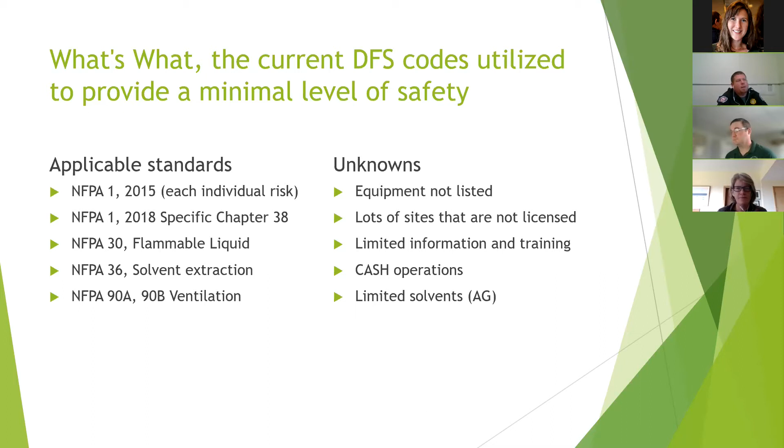I'll let Ben go to the next slide. Thank you, Landon. So we wanted to talk real quick, and we're not going to spend a lot of time on this because we want to spend more time on the hazards associated.

But this is a quick slide to talk about what our permitting process is, and how people can obtain permits if they are considered a public building in accordance with the statute we've already discussed. The biggest thing is, if you have questions, feel free to reach out to us. I know sometimes it can be scary to call the state, but we're there to help, and we're not going to jump down people's throats by any means.

Generally, contact is made with one of our 4 regional offices. The state is basically split into 4 quadrants, Northeast, Northwest, Southeast, Southwest. So if you're in that geographical area, say the Northeast Kingdom, you would contact my regional office, the Waterbury office.

Typically your call is directed to a plan reviewer, who will then either loop in Landon or myself, and we'll set up a meeting. Typically the meeting is good between the owner, the engineer, design team, and a plan reviewer.

One thing to note, what we do require is that a designer of record is needed, and that's typically a licensed person, either a licensed electrical engineer, mechanical engineer, architect, or all 3 in some cases, based upon the level of the operation being requested.

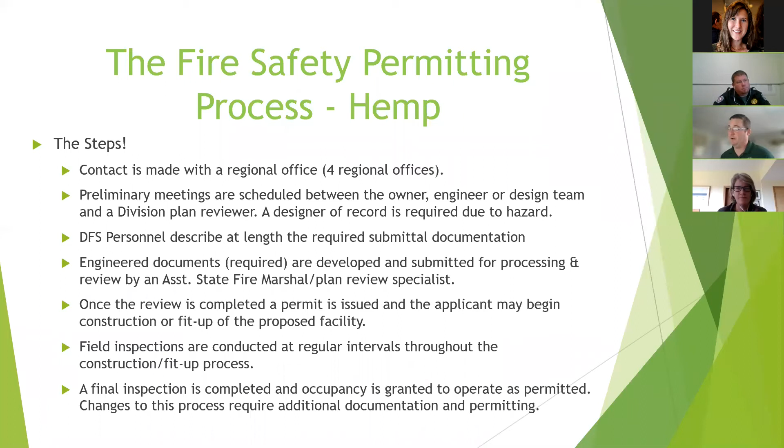The important message is that you should use equipment that's UL listed. You should also utilize equipment in accordance with its manufacturer's instructions, and you shouldn't alter equipment outside of those parameters, because that's the human factor. Once we start altering things, that's where Ben and I see the greatest risk and hazards associated with the industry.

This is just a small scale example, not something you're typically going to see in an on-farm operation, but the premise of using things the way they're intended to be utilized goes through all scales of production. It doesn't just stop at your small home grower, it goes all the way up through some of the larger cannabis producers. Let's face it, in Vermont we're very resourceful people, and we do what we have to do to get the job done. But sometimes what happens is we create inadvertent safety risks.

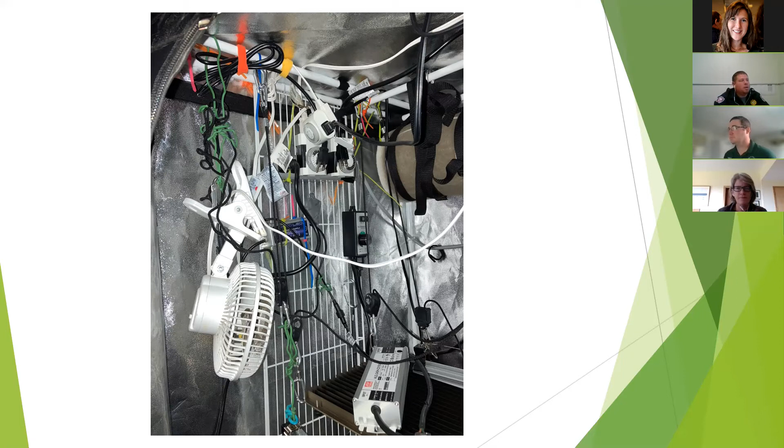So our role in this is somewhat limited, admittedly, but something we certainly want people to be aware of when applying these substances inside of buildings. A part of our role when it comes to herbicides, fungicides, pesticides is storage of those products, to make sure that they're stored in limited quantities allowed by the codes and standards we adopt. And like Ben mentioned, signage is a form of notification, but also notifying the local fire department if you're going to be doing some fumigating of hazardous materials is something else our codes require, for obvious reasons, so that we don't have unintended exposure to a hazardous product.

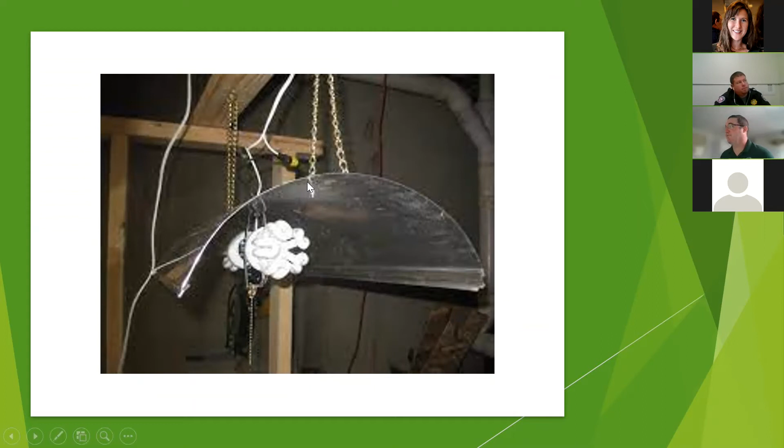That was a great question, thanks Landon. So again, another example here - looks like we have some zip cords that have been separated to make this lighting fixture. This actually looks like a piece of chimney tin or rigid metal ductwork that someone made into a light. Again, ingenuity is definitely in our roots here in Vermont. This person probably doesn't think there's any hazard here, but as a code official and fire marshal, this certainly has some hazards associated with it.

Again, there's more examples here of various grow operations. These are smaller scale than you're typically going to see on your farm. But again, you have unintended consequences.

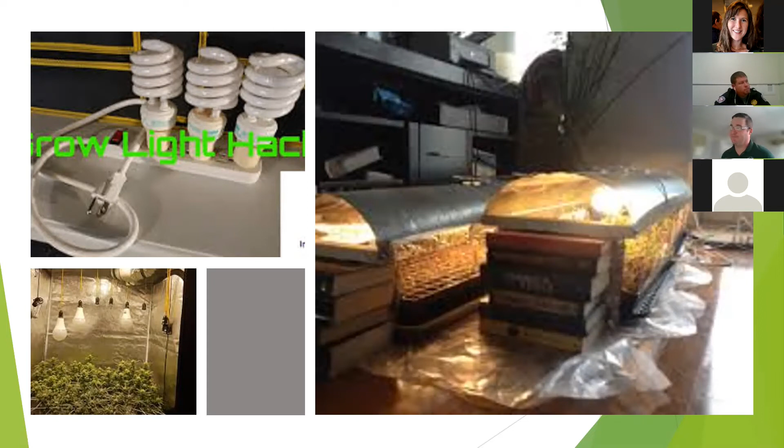In this picture on the right, we have some poly filming on the floor. We're supporting our light fixtures with books that are certainly flammable. On the left, we have light bulbs that are screwed into plug-in sockets into a power strip, not the intended use of that power strip. You're going to have a lot of heat produced there, which can potentially cause issues.

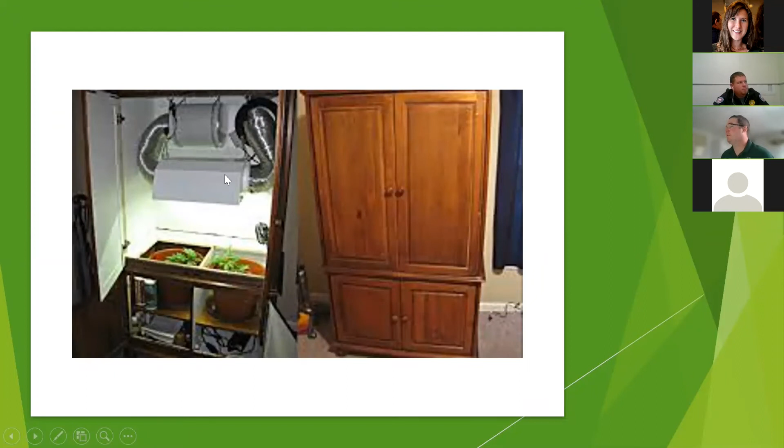So again, another example, we have a hutch that's modified to have an air handling unit in it, some lighting. The ingenuity again. So here we have more of a larger scale grow operation where we have a controlled environment. We have some sources of heat, suspended lighting with ventilation. Looks like we might have some CO2 infusion going on here. Certainly irrigation, fans for movement of air, something more along the lines of what we'd like to see for a grow operation.

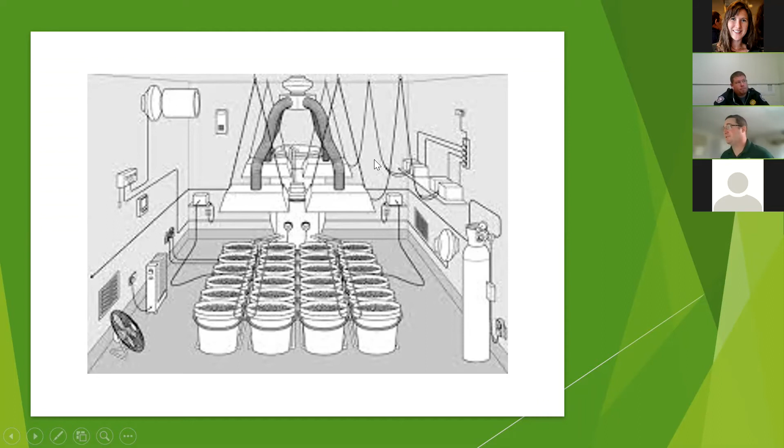And that arrangement can happen at any scale. This picture is a great example. This was a proposed grow facility, and you can see the scale of this facility. But that previous slide happens inside of this building hundreds of times over in regards to scale. But the risks are still the same. We want to make sure that we're using appropriate equipment and utilizing it in accordance with its design and its listings.

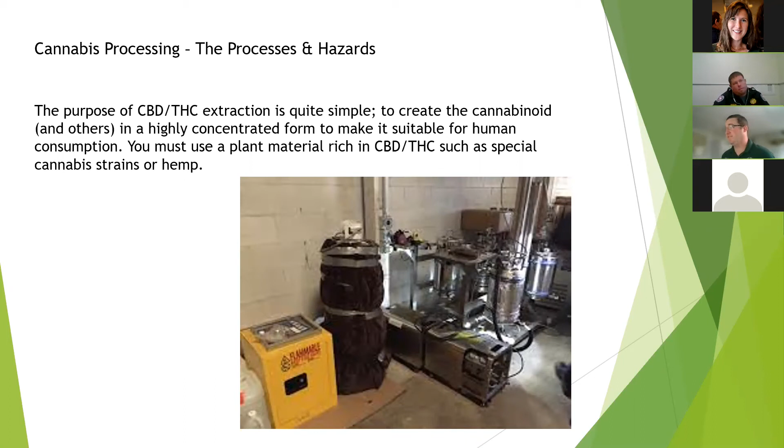And that does have hazards associated with it, unfortunately. You'll see that Ben and I have a bit of a focus on extraction because a lot of the extraction has gone both small scale and large scale. So it is something we could very likely see as part of processing on farms, and we know that does happen in the state of Vermont now.

So some of the different forms, to get through this - there's CO2 extraction. We do have pros and cons listed here for CO2 extraction, but we're just going to go through these pretty quickly. They are identified risks, and for us, from the Division of Fire Safety standpoint, it is probably the highest risk of the entire life cycle in product use of the hemp or cannabis plant.

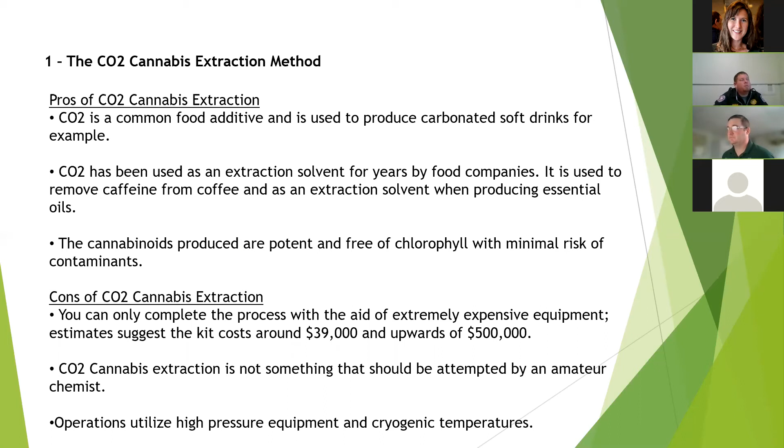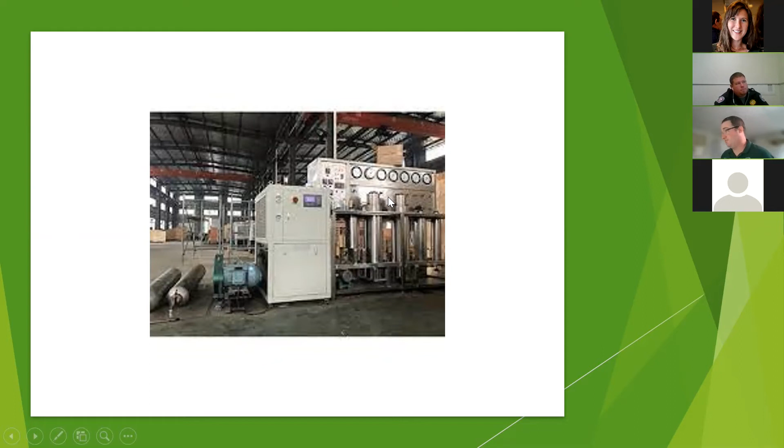Go to the next slide, Ben. So here's an example of a piece of large scale equipment. This is a CO2 extraction unit, I believe, Ben. Yep, you got the cylinders over to the right there - that's where your raw product would go in, and then the CO2 is driven through that and changed from a supercritical to subcritical state. That's where your actual raw product would come out on the other end of that process. Just a real brief overview.

Again, CO2 extraction has been used in the industry for a long time, primarily for food additives and extractions of food. So that technology is pretty well vetted. It hasn't been used a lot in the cannabis or hemp market, but it certainly is now. It's one of our more favored, I would say second only to ethanol extraction methods, just because the equipment is slightly more expensive than your average ethanol extraction skid.

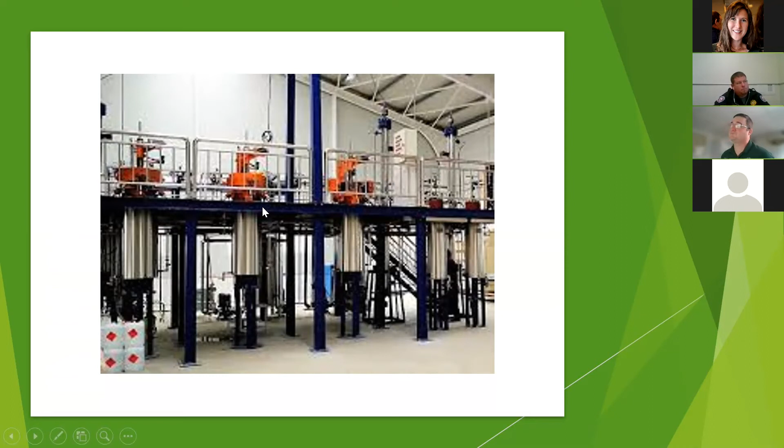Thanks, Ben. So we have some good examples and some not so good examples here of some extraction processes. This kind of doesn't look like it was really set up to be an extraction environment. We've got some product being stored that probably shouldn't be in the same environment as the processing. And when we see items like this, this is why we highly encourage anybody going into the extraction side of things to get an architect and engineer involved in their process as early as possible, so that we don't walk into a situation that may look organized in this case, but there is still a lot of risk happening in this picture. Equipment needs to be separated, storage needs to be separated, and the storage of hazardous materials needs to be regulated, with appropriate amounts for the use of the building and the life safety requirements for the building.

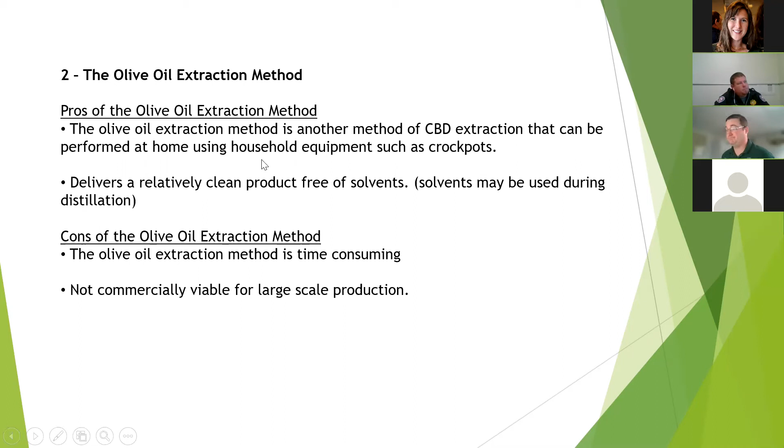Ben? So another one of the extraction methods we see is the olive oil extraction method. This is not done very often - that's not to say people don't do it and it's not utilized, but this is more what you're going to see from your small scale home producer. Believe it or not, you can extract cannabinoids from cannabis plants using olive oil. Here's some examples of it - basically mash it up, use a heat source, and then wait for the oils to separate out.

Again, similar to olive oil extraction, this is basically a process where they freeze the product and then remove the oils after that process. Again, there are concerns with this as well.

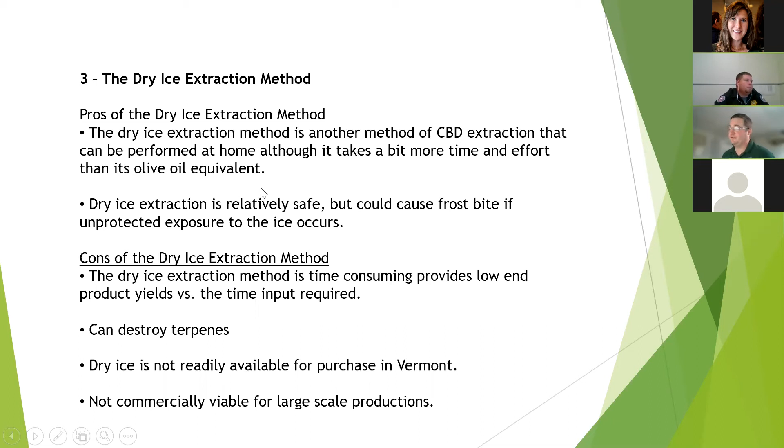But probably this is the number one, and this is the solvent extraction method. There are several different solvents that can be used. In Vermont, the Agency of Agriculture limits what extraction solvents can be used in the initial extraction process. But then we also have some solvents that are used on the back end to refine the product and break it down into different distillates. So typically you're going to see ethanol be your primary extraction medium. But on the back end, people do use butane, pentane, and other flammable liquids that, if exposed to their flammability limit, can flash and cause injury or death, and certainly fire.

So we want to make sure that we're definitely addressing hazards if people are going to be using these on their farms.

How this applies to the farming industry is, some farmers have decided that they don't want to rely on another party to extract or further process their plant. So they brought these processes onto the farm, and these are the recognized and identified hazards with doing that: bringing hazardous materials like ethanol or alcohol-based products that have extremely low ignition temperatures and have limitations on the amount of quantities that are deemed safe. Ben and I have, over the last few years, seen examples of only, say 50 gallons being utilized at a time, to facilities that want to have 5,000 gallons of a highly flammable solvent, such as ethanol, stored within a building. And they all come with different risks and different codes and standards that are applicable to them.

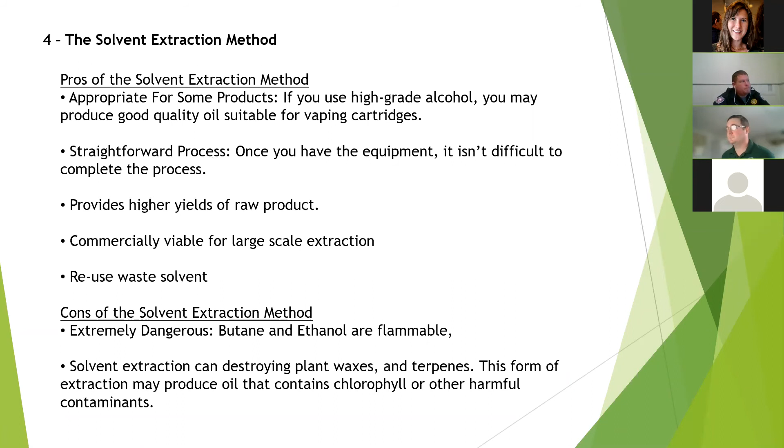So we touched on this earlier, but the biggest problem that we've run into with production equipment is that most of it is repurposed lab equipment that people have reassembled and re-engineered, if you will, to be utilized for extraction. And the biggest concern with that from us is that it doesn't bear an underwriter's laboratory listing. In other words, it hasn't been evaluated in accordance with any type of standard. In this case, most of them are ASTM standards. And that creates a hazard because, to the layperson, putting this motor next to this pump that's moving alcohol, well, that pump is not a totally enclosed motor. And if there is vapor present, well, now that motor, in this case, could become a source of ignition for that ethanol vapor. And now we have a fire and potentially an injury. So it's very important that we make sure that equipment is listed, and that's in its entirety. So not each individual piece, but that all the components are listed to be utilized together in that manner for that use.

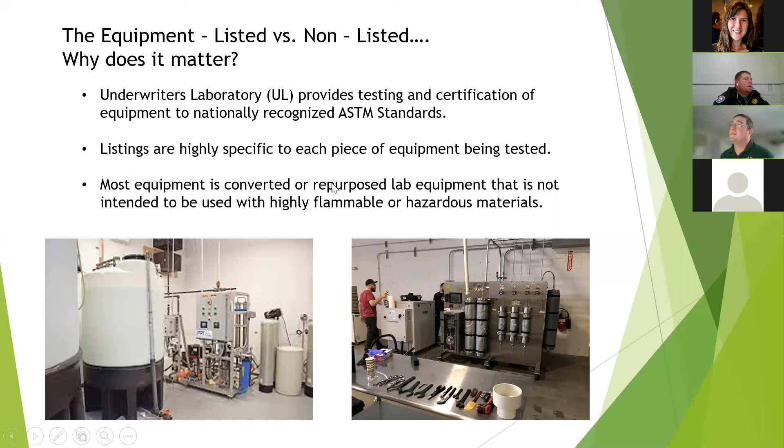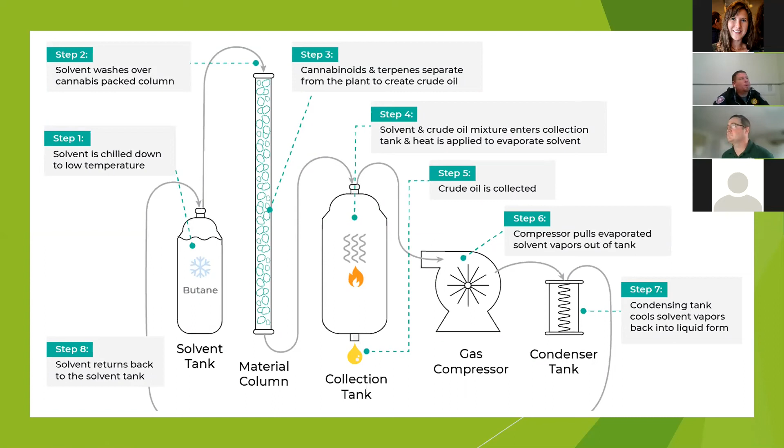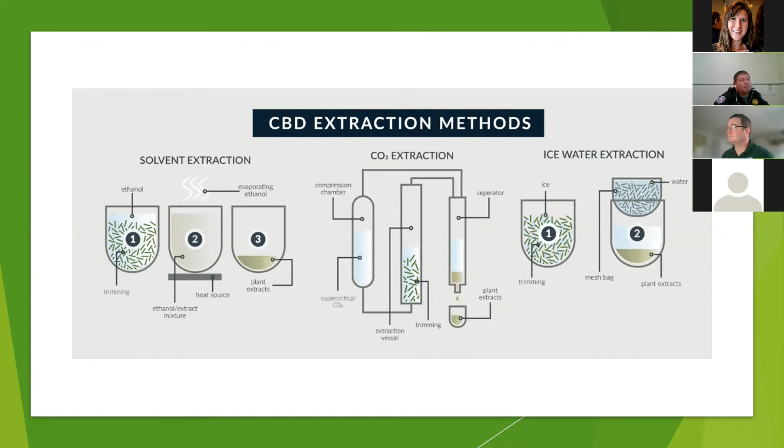Thanks, Ben. So a lot of the extraction equipment that has reached the industry didn't start in this industry. It actually started in a different industrial process, or came from a scientific process in a lab. So a lot of the equipment being utilized in CBD extraction or cannabis extraction processes didn't originate or wasn't designed for this use. It actually had a different life before it was adapted to processing cannabis.

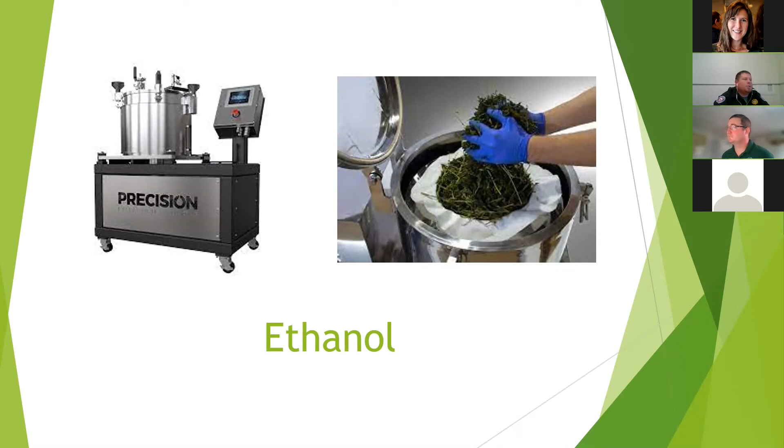And that doesn't just cover extraction, believe it or not. Mass scale drying operations also use equipment that just really wasn't designed to do that. And we have a process for that, which is to have an engineer of record evaluate the process and the equipment to make sure it's going to meet a safety standard and not become more of a risk and a hazard, so we can minimize those things.

We've literally seen any number of configurations, and that's a great point to bring up about drying. We talk a lot about extraction, but unless you're passively drying hemp, hanging it from the rafters, if you're using mechanical equipment, there's also risks inherent with that, because obviously you're drying a fibrous plant material using heat in most cases. We don't share specifics in presentations like this because we respect people's proprietary creations, but we've seen any number of configurations. We've seen equipment come over from China where all of the nameplates and instructions were in Mandarin Chinese, which obviously presented a problem. But drying is certainly something you want to be aware of as well. It's not just the extraction, although we focus on that because it is the highest hazard.

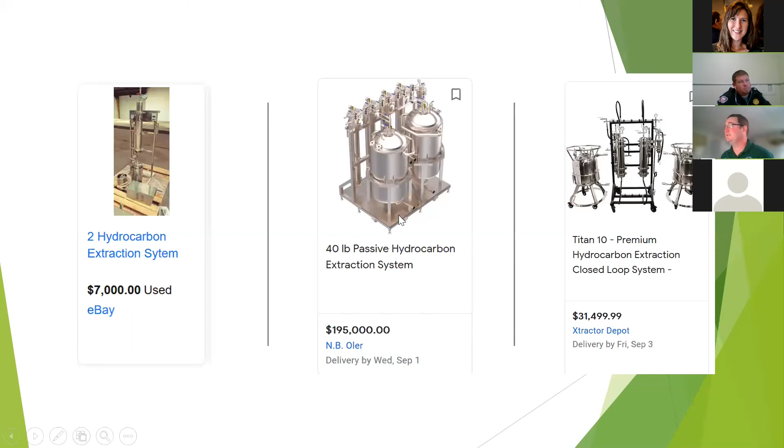Especially nowadays with the market, inflation, and all the challenges we're facing, not having to move that product from your farm to an extraction facility saves money. If you can do it right on farm, you're not paying to have that product trucked. Just something to keep in mind.

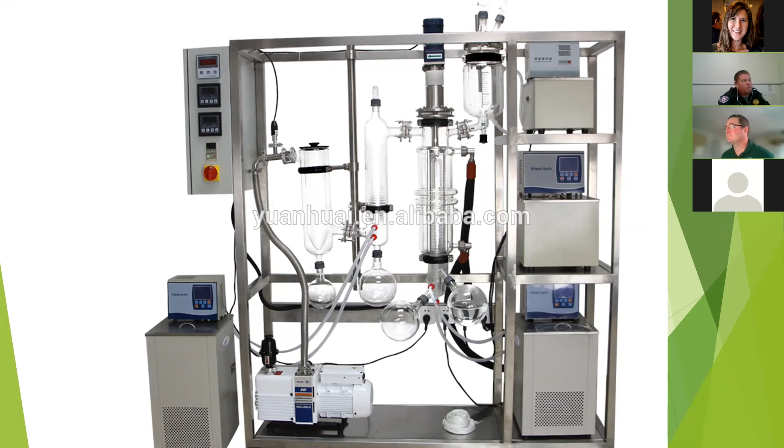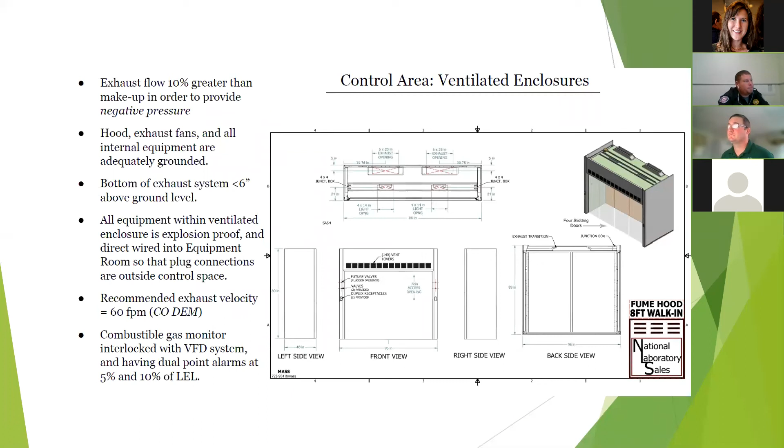A good disclaimer, and this is a good time for it since there are a lot of different email addresses and advertisements here: Ben and I will never have a recommendation in regards to what's better or who to utilize as an architect or an engineer. There's a reason for that, so that we don't have any conflicts of interest. We let people make their own choices regarding the equipment they want to use and the design professionals they want to use. We guide you through that process and work with the people you hire and choose to hire, but by no means do we recommend any specific equipment.

But I will say this: Underwriters Laboratory has a design standard for extraction equipment at this time, and I believe three pieces of equipment have actually been through the UL listing and testing process. So there is a whole assembly extraction equipment that is UL listed and available on the market as of this year.

Let's move on to a couple more slides. What we're looking at and scrolling through here is some more further processing or distillation as part of the extraction, or furthering to develop the end use product for retail sales.

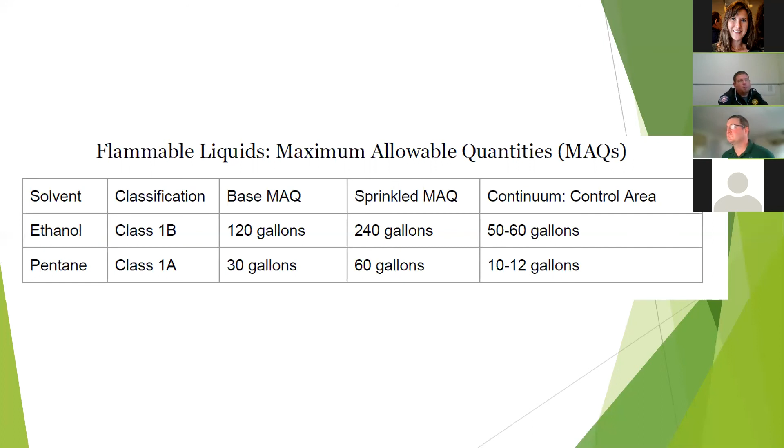Pentane, on the other hand, is limited to say 30 gallons, and it does have a lot of safe handling practices and electrical life safety requirements that come along with it. Thanks, Ben.

In this picture, it looks like we've got some propane extraction. You'll see the propane tanks on the right-hand side, one hooked up, and a vacuum pump. I hope that's not a generator, but it kind of resembles one on the floor, and maybe it's a vacuum pump. But that looks like a compressor, which came from an air conditioning unit that they're utilizing to recompress some of the propane from a vapor to a liquid to recover it. Thanks, Ben.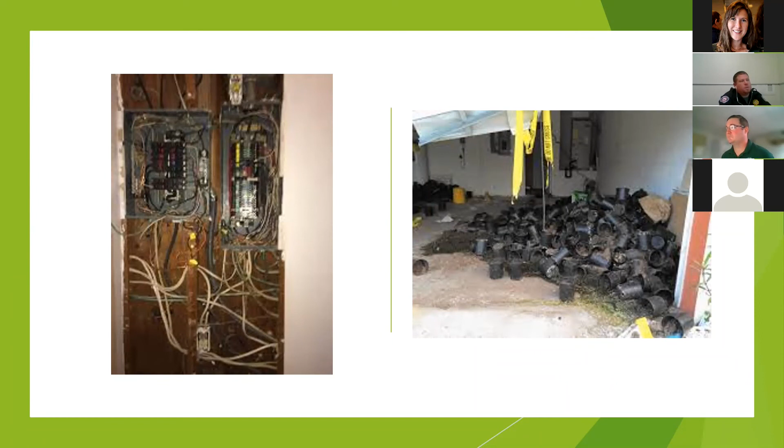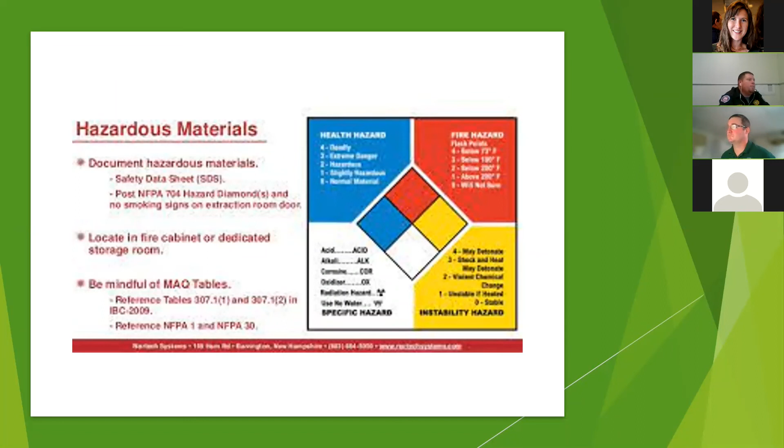And as we get into the hazardous materials part of the industry, we will require that labels are placed on doors so that the fire department and the public know that there are hazardous materials or operations in a building before they walk into that building. It's to give people information.

So what's next? The industry has a lot of different applications, from industrial uses to smokable flower to extracted CBD products. In the future in Vermont, we'll actually have a whole other side of this plant's life cycle and industry and heritage, which will be the THC side of things and the legal sales of recreational marijuana that will happen at some point in the state of Vermont.

So what's next is we really don't know. Ben and I have worked with a lot of different agencies, farms, companies, and individuals over time, and we're always meeting new and exciting things that are happening within the industry.

Ben, do you have anything else to add? No, I think that's a great point. I think the industry is going to continue to grow, and making sure that we're growing safely is one of the most paramount things we can hammer home to people. We're a phone call away, and sometimes that call can save lives in the long run. As this industry continues to grow, making sure we're doing this safely so it doesn't create issues where we have to step back, and allowing the industry to grow and move forward, is our goal at Fire Safety. We want to be a resource for folks every step of the way, not a hindrance.

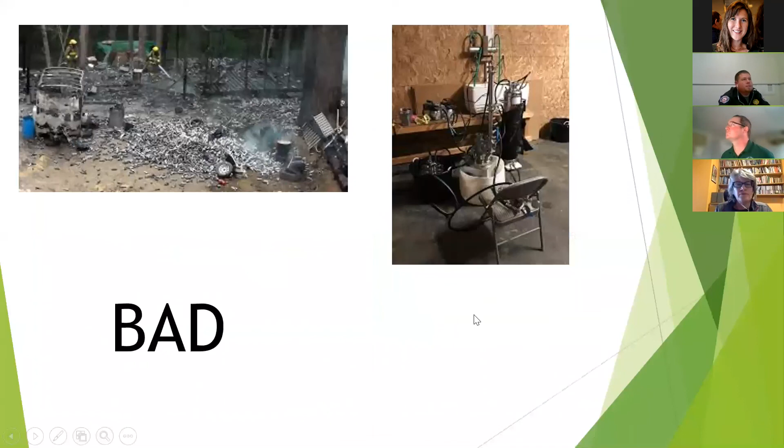Yeah, I just dropped that email in the chat, so hopefully that's okay. So for that grower who asked that question, go ahead and send your photos to Landon. And just to emphasize, it's a steep learning curve, and even though there are these regulations, the emphasis for this whole program is on education, really reducing risk and helping farmers and growers identify risk, because it's tough to do it all. New industry, new regulations, so much change, it's kind of tough to stay on top of it all, and we see new change every day in this industry.

I can't emphasize that enough. We're here to work with everybody, because as the industry changes, we need to change along with it, and we need to grow and become educated ourselves and help educate the public. So we're always about conversation and communication.